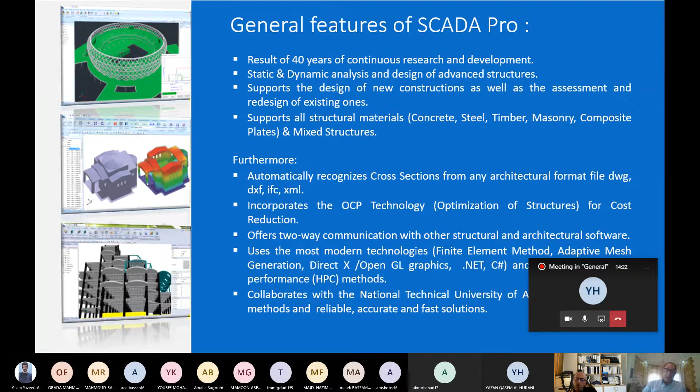It also offers two-way communication with other architectural software and uses the most modern technologies. Our software has a collaboration with the National Technical University of Athens to create new methods and reliable, accurate, and fast solutions.

Also, its interoperability with leading applications and standard file types. SCADA Pro integrates BIM technology with two-way communication with any architectural and structural programs.

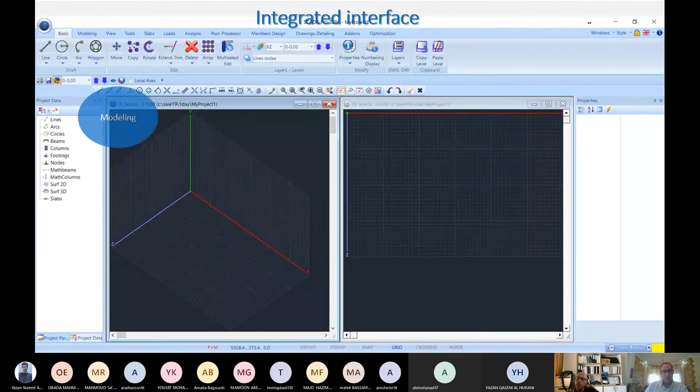You see here, this is the interface of SCADA Pro when you open it. It has different steps that we're going to use to start. We're going to start from modeling. You can model your structures, your foundations, the elements.

You're going to see the loads, static loads, dynamic loads, using different regulations, Eurocodes or each country's regulations and annexations. It also has the Saudi building code. You can do the analysis, which automatically calculates the combinations.

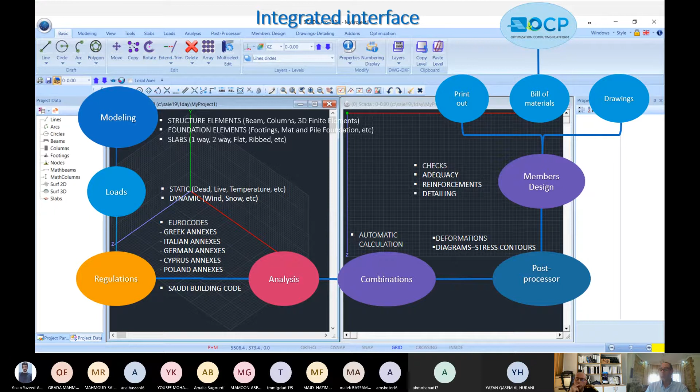In the post-process, we're going to see the deformations and the structural stresses and others. And also in the member design, we'll do the checks, reinforcement, and detailing. In the output, you're going to make the drawings, the bill of materials, and the printout, and finally we can do the optimization of the structure.

Also, it has an advanced interface. You can create multiple windows in your interface when you open the program, and these multiple interfaces can give you a direct display of the model on screens, checks, and also give you display and edit of data with tables in front of you.

It also has a powerful graphic library with high resolution virtual display. You can see the whole structure that you have modeled.

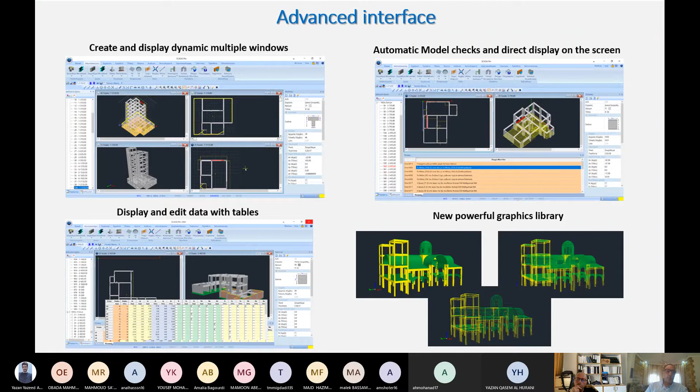Also, SCADA Pro is a multilingual environment which contains 8 languages, which also does the analysis and checks with the country's regulations and annexations, and also provides printouts in the respective languages. Also, it integrates the Arab regulations, Saudi building codes for concrete, steel, and masonry buildings.

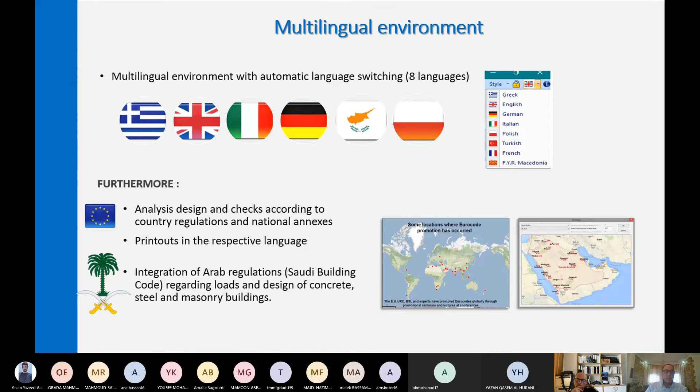And see what SCADA Pro enables the user to do and makes your life more convenient in the workspace. As we said, it recognizes cross sections for any architectural design, 2D or 3D DXF files.

You can insert it automatically just to apply the cross sections, and make the final model of the structure.

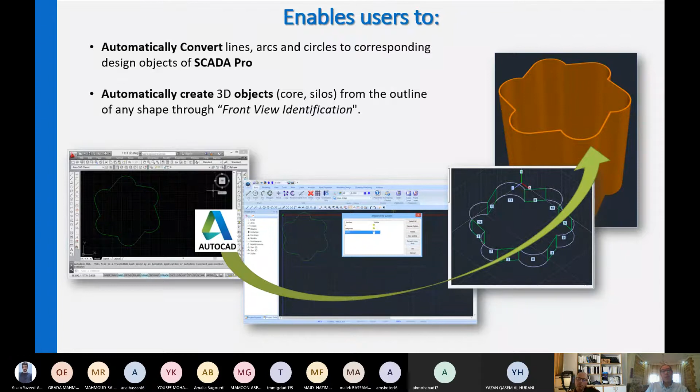Also, it enables the users to automatically convert lines, arcs, and circles into corresponding design objects of SCADA Pro. It automatically creates 3D objects from the outlines of any shapes through the front view identification, which helps you create any structure you want.

Also, it enables the users bi-directional communication between ETABS and SAP with SCADA Pro.

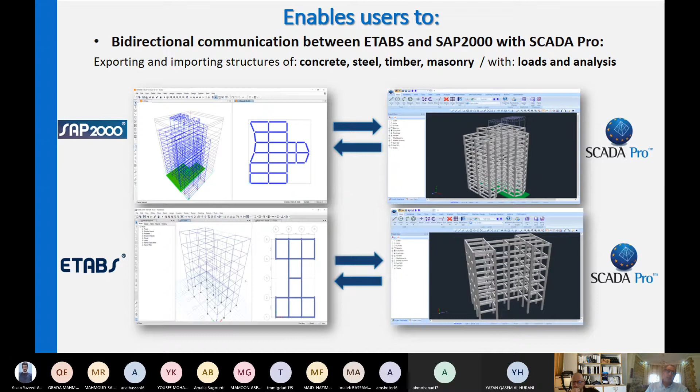We can import and export concrete, steel, timber, and masonry with loads and analysis. For example, here we have a project from SAP, which has the American codes. You can import it into SCADA Pro to use the Euro codes and do the modeling and design of the whole structure. Or you can model and design the structure in SCADA Pro, which has simplicity and other capabilities, and just do the analysis for the American codes in ETABS.

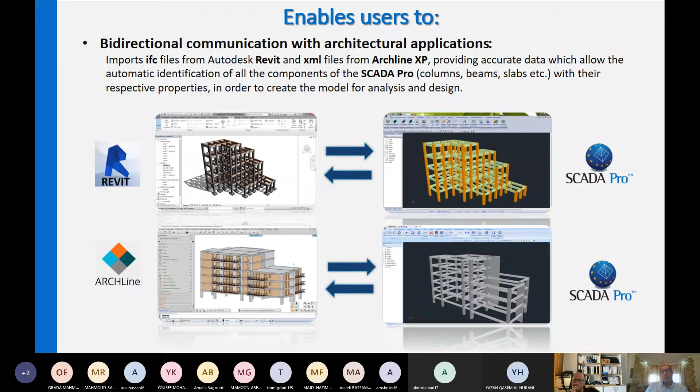Also, we have bidirectional communication with architecture applications. You can import files from Revit and xml files from Archline XP that provide accurate data, allowing automatic identification of all components in SCADA Pro—columns, beams, slabs, etc.—with their respective properties in order to create the model for analysis and design.

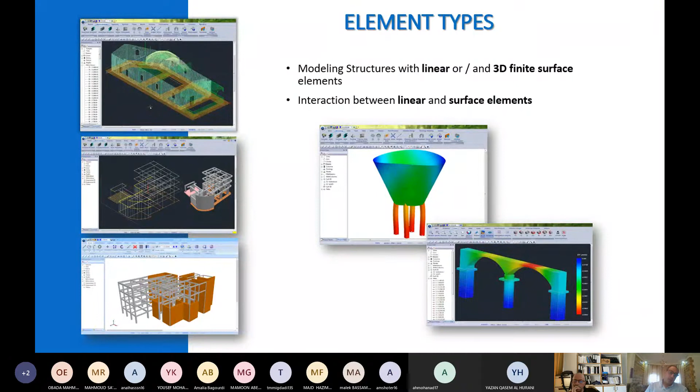Also, we have different elements that the software uses, so you can model structures with linear and 3D finite elements in interaction, also between linear and surface elements. So you have many capabilities in the software.

Also, the types of analysis the software does: we have static analysis, linear static analysis, linear dynamic analysis, pushover analysis—the professor will explain to you what pushover analysis is—linear time history analysis, and non-linear time history analysis according to the Eurocode and Saudi building code.

Type of materials that you use—we're going to start from materials. We're going to start with concrete.

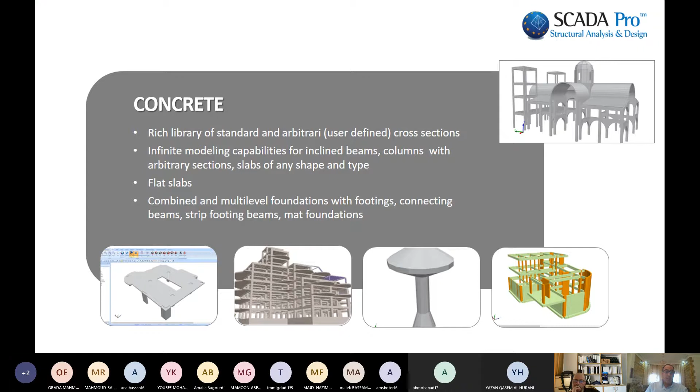SCADA Pro offers a rich library of standard and arbitrary cross sections, infinite modeling and capabilities for beams, columns with arbitrary sections, slabs of any shape and type. Also, it can do flat slabs combined in multi-level foundations with footing, connecting beams, strip footing beams, and mat foundations.

So also here, the simplicity of the software gives you unique features. The software automatically recognizes the thickness of the slabs and automatically designs the whole structure members and displays them.

It also gives you fail design checks, so you can know where the failure is and what the cause of the failure is, displaying the strength ratio in different colors. For example, red is failure, pink is a serviceability failure. You can alter that, and cyan means there's no failure.

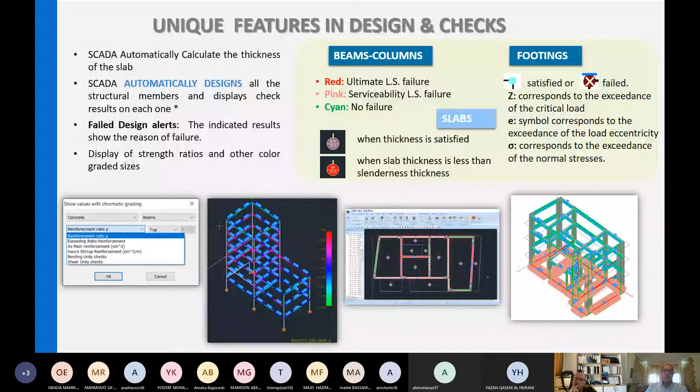Also you can see different indications for the slabs and for the footings. Also, with the unique features in design, there are powerful reinforcement editors for editing, modification, and 3D display of layers of reinforcement.

So you can do the reinforcement, automatic bending, shear checking, and moment resistance calculation by the M-N interaction diagrams.

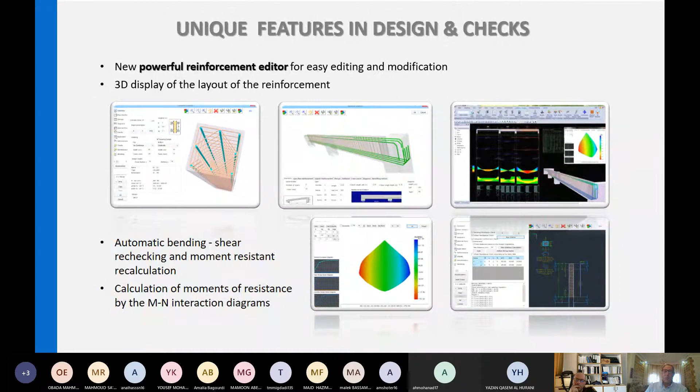So you can do all these, alter them and change them, and see them in 3D view and change and alter them. This will make your life simpler to edit and change these things.

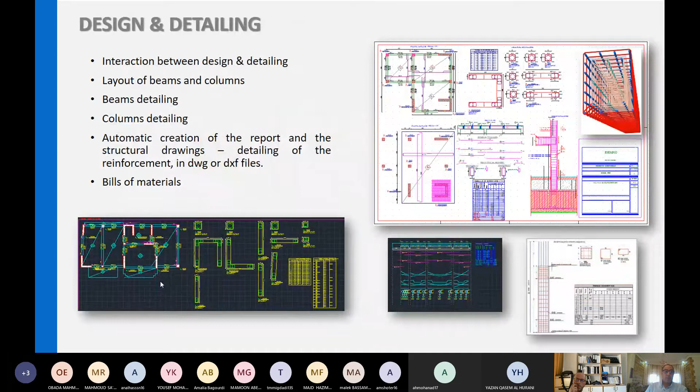Also, in design details, it gives you layouts of the beams, the columns, beam detailing, column detailing. Also, you can create a report for structural drawings and details and reinforcements into a DWG file, which will also give you the bill of materials.

For steel, we have a rich library of steel connections, steel sections, hot rolled and cold formed, with automatic templates for different typical structures. It automatically calculates and distributes wind loads and snow loads, and automatically calculates the combinations.

Also, you're going to see here we have different steel connections. The software has a library of different steel connections that you can use to modify and change your structure and the elements you're going to change.

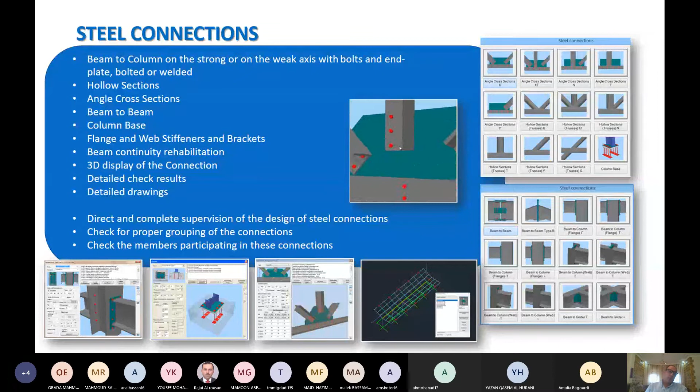You can do design checks for the steel member connections, checking structure members for bending, torsion, buckling—all necessary checks for ultimate and serviceability limits—and analysis and design of composite structures, and design of all types of structures.

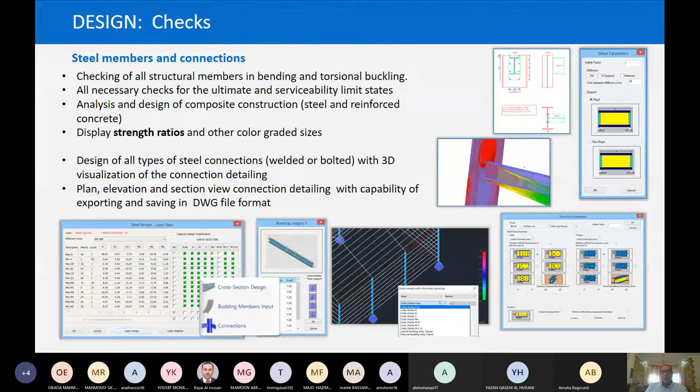All these you can plan and evaluate in the section view, with connecting details and the capability of exporting and saving it to a DWG file format. Also, we have cold formed steel sections.

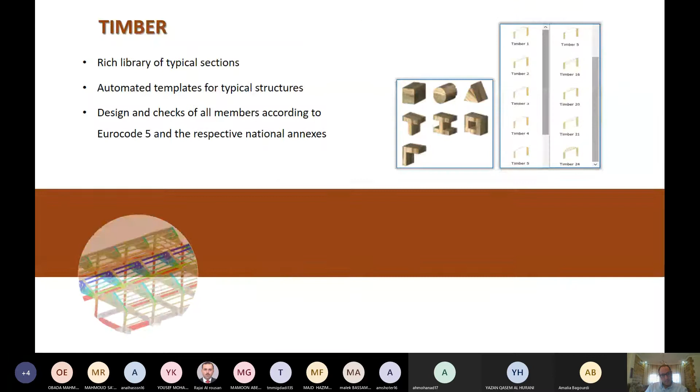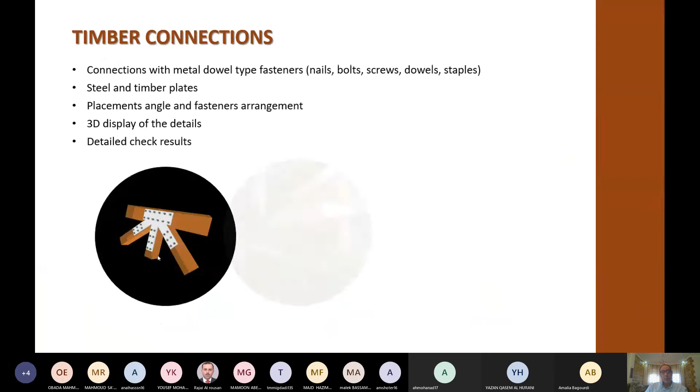Also, timber: a library of typical sections and automated templates and design checks for all members according to Eurocode 5 and respective national annexes. Also, timber connections of various types.

It does the checks for the timber members and connections according to Eurocode 5.

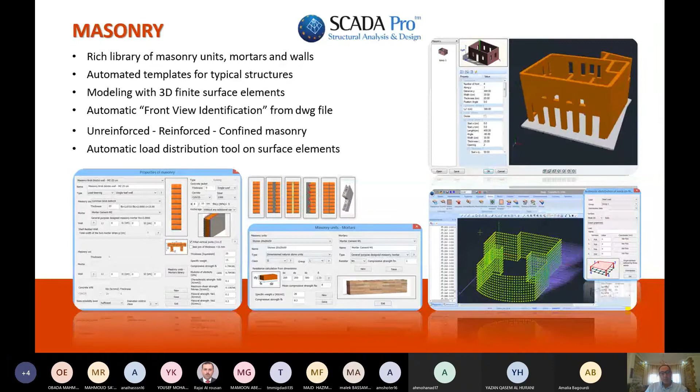Also, we have masonry: a rich library of masonry units and mortar walls, and automated templates for typical structures, which you can model with 3D finite surface elements, along with automatic front view identification from the DWG file. It will also automatically distribute loads across these elements and perform design checks for piers and spandrels of the masonry wall according to Eurocode 6.

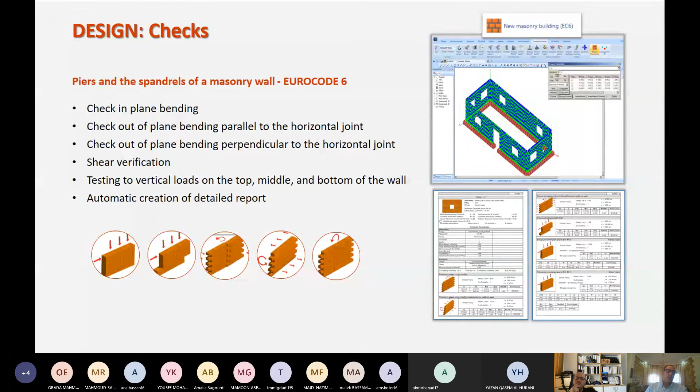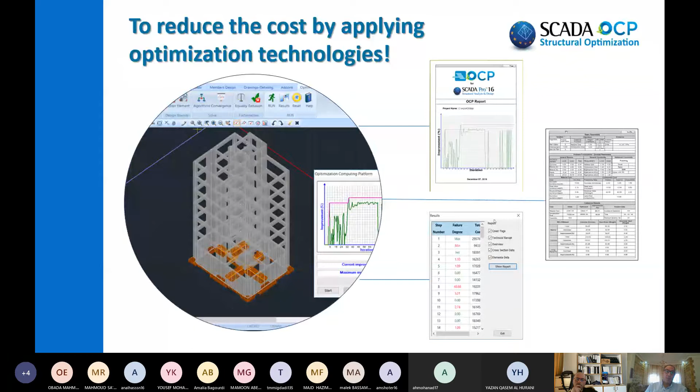And here finally we have the SCADA Pro OCP structural optimization module. It's a module to reduce cost by applying optimization technology.

ACE-OCP is a computing platform that applies optimization theory to real structures with the ultimate goal of minimizing construction costs from materials and labor. This will help you reduce your cost by 10 to 25% in any project.

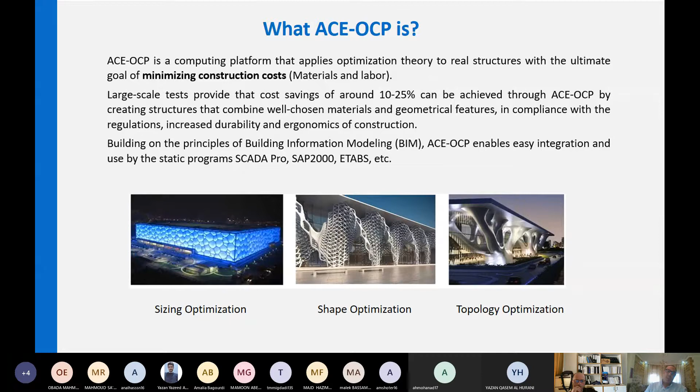And it's according to the regulations and codes you're using. Also, it has BIM technology, building information modeling, so you can use it with other software like SCADA Pro, SAP2000, or ETABS and others.

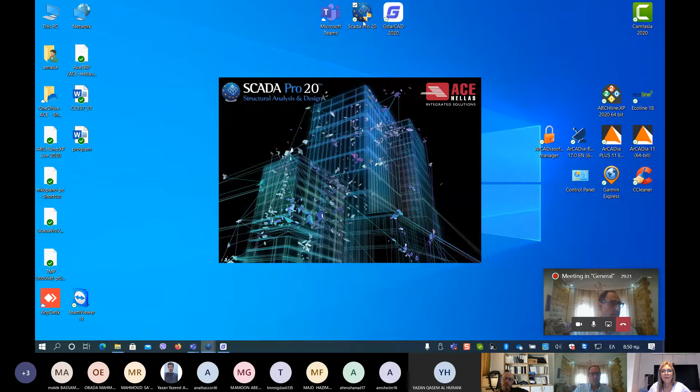So I waited a minute to open the software, and I will show you what I want all of you to do. I believe you already have the student license and have the software on your PCs. What I want you to do is right click, go to properties, compatibility, and run this program as administrator. In my computer it's already enabled because it's already done. So click this, then apply, and you will use it as administrator. This is important because you will have all the opportunities the software gives you. So let me go on. Why do I have it two times? Let me start from the beginning.

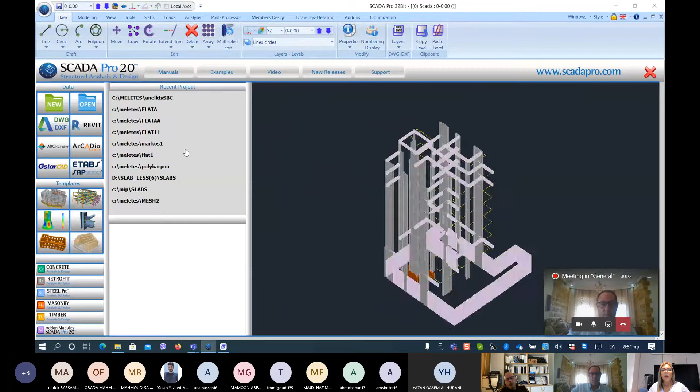Okay, this is how the software begins. In the middle of the interface, you see this window. This window gives you a lot of opportunities.

Let me explain. This is the first part we see, and you can click on these tabs to start a new project or open an existing project. You can also use this button, which we will use together. This is a very important button because you can do the automatic recognition of the structural elements, like Mohammed told you about in his presentation. We will push this button and see what we can do. But let me go on.

Okay, this is a Revit button. This means that if I click on Revit, I can read a Revit file, an IFC file, and import it directly inside the SCADA Pro environment.

ArchLine XP is the same thing, I can read an XML file. ArCADia is another architectural software, so I can do the architectural part and then use it directly inside SCADA Pro. GstarCAD is another software like AutoCAD. And ETABS and SAP, you know very well, are structural software that can be read by SCADA, and not only read, I can continue the project inside SCADA.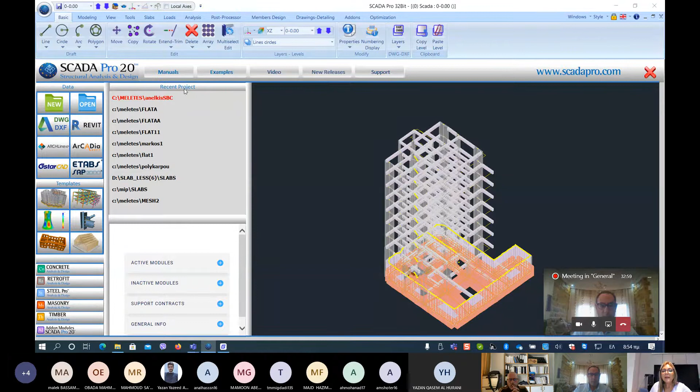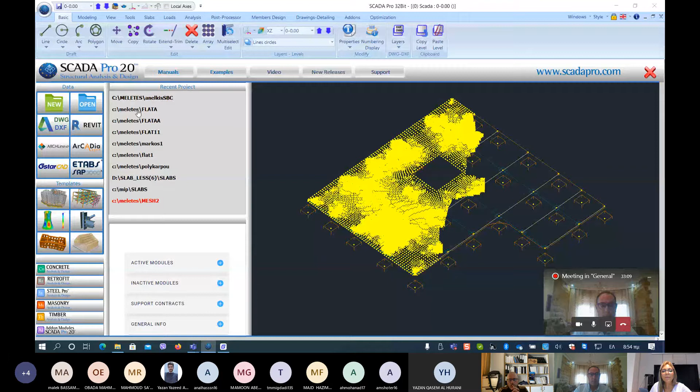Here I can see some recent projects. If I click on this, I can have a preview of the model that is inside this project file, and also some details about the modules you have, what is active and what is not active in your permission.

Furthermore, if I click manuals, this would be very useful for you. Inside you can find some PDF files that contain the manuals of the software. Each manual has the same name as the tabs you see on top, like basic, modeling, view, tools. Inside each one, you can see the explanation of all the commands contained in these tabs.

Inside examples, you will have other PDF files that are entire examples of different projects. We will talk about the first example, which contains a new concrete building, and we can see a lot of features of how to complete an entire project. This will be useful for you.

Videos, you have the opportunity to see some videos that can help you have a look at what you can do inside SCADA and how to do it. These are the most important. New Releases and support are not so important.

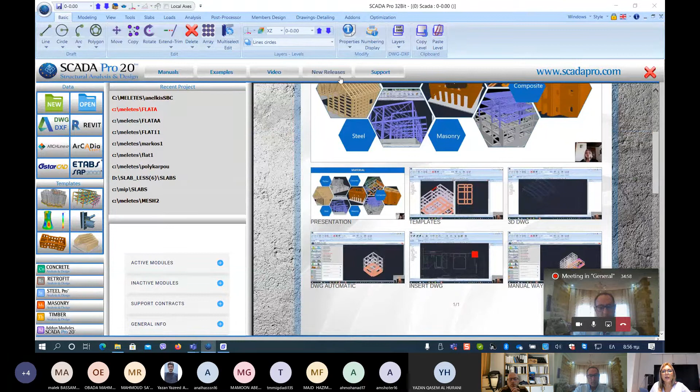So we explained this first window that is very important, but let me tell you something: if you don't close this window, you cannot do anything. I click here and I only hear a bling, so I can't do anything. I need to either close this window or click one button in order to start doing something.

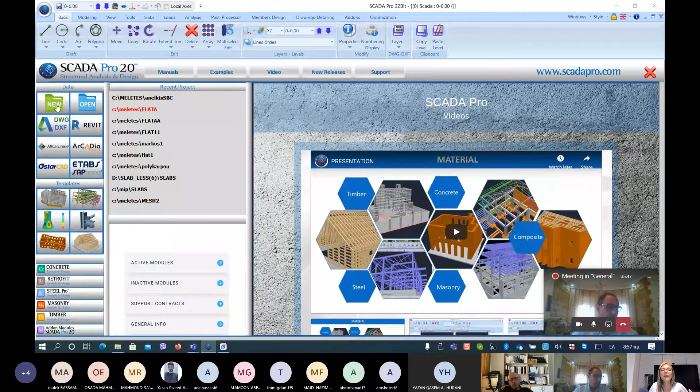Let me tell you another important tip. I will start with New, not an automatic way with anything ready. I will not use any beam connection, just New. I click New, and here the software tells me: please give me the name of the project. So the first thing you always have to do is type a name for the project.

So I will say this will be called lesson1. Let me tell you something: because this is an international software, we have to take care of some rules. Because of the different characters we have in Greek language, in other languages, please use only English, Latin letters in order to type the names. Use only Latin letters and/or numbers, and please do not use any question marks, lines, spaces, or specific characters, so that the software can be used all around the world.

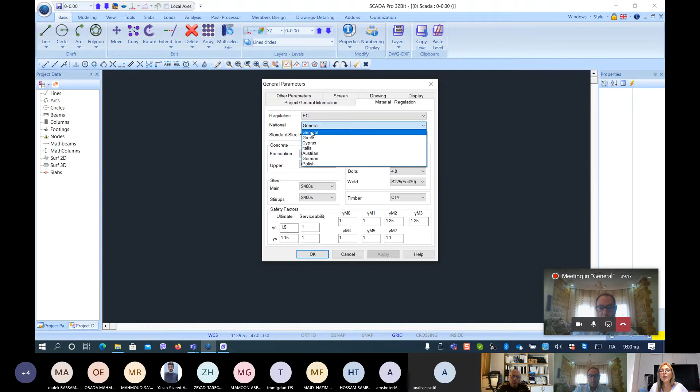Now I click OK, and then the next window that comes automatically is the general parameters window. It's nice to start by giving the regulation. Here I have the Greek regulation, but you don't need this in your country. I want you to decide either the Saudi building codes, or otherwise, and I believe this is better, decide the Eurocodes. I click Eurocodes, and here I have some annexes.

So in this case you will use the general Eurocode, and here you can decide from the beginning the quality of the materials used in your country. For example, in my country we use C25/30 even for foundation and for the upper structure, and for example usually this quality of steel for the reinforcement. Here you find the qualities that are inside Eurocode, and you decide what to use.

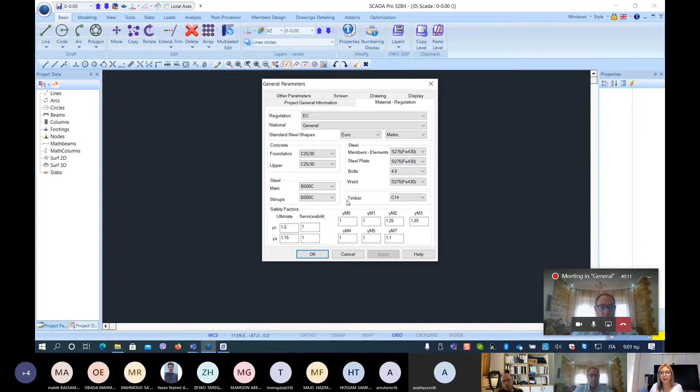I click OK, and now everything starts. You see two kinds of windows inside the environment. I can decide to switch off one of them and keep the other, or I can decide to create more windows like this, and then decide how to dispose all these windows.

Why do we have all these windows? Because you can see the 2D view, the 3D view, and maybe the virtual view. Maybe you have two screens, so you can move one window into the other screen. The most important thing is that everything you do in one window, you can see it in each one. You can also start in one window and continue in another. We will see all these things while we work on SCADA.

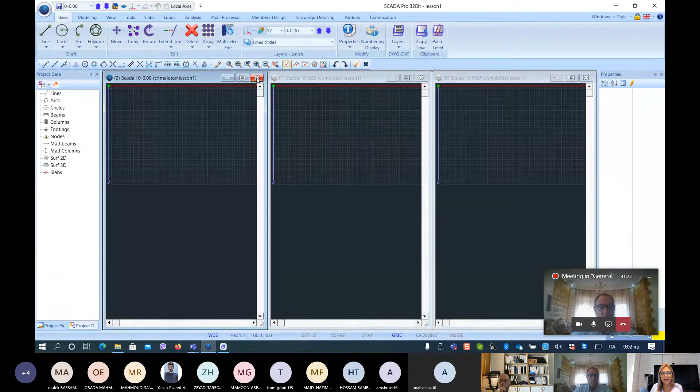Let me start with one window. Here we are in the 2D view. You may notice something a little strange: the 2D view is the XZ axis, and the Y axis is the vertical one. This is fixed, you cannot change it. You will use XZ for the floor plan, and Y will be the height.

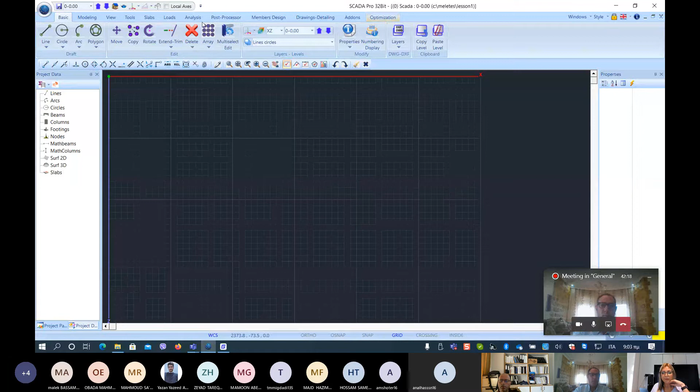In this environment, let's start explaining these tabs. We'll start with the basic one. Here you can find commands very common in CAD software: you can draw a line, a circle, an arc, move, copy, rotate, extend, trim, delete. So you see a lot of architectural commands, and this is what we call architectural commands.

Here you can see layers, something very common in CAD software, and the levels. Let me explain this. You see that I am at level 0. So the first window is level 0. What is really important to understand from the beginning is that level 0 is the foundation level.

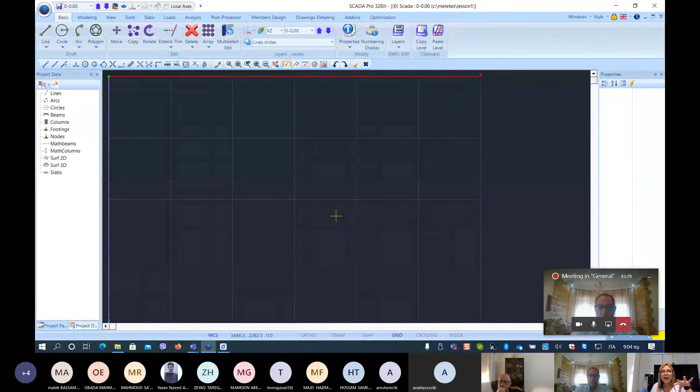So let me explain: the level that you put as the foundation is this one. Maybe you have a construction with 2 or 3 foundations. Some big buildings have a lot of foundations, but don't worry, this will be the first, bottom foundation. That means the first level will be the second foundation, then the third foundation, and then the regular levels start.

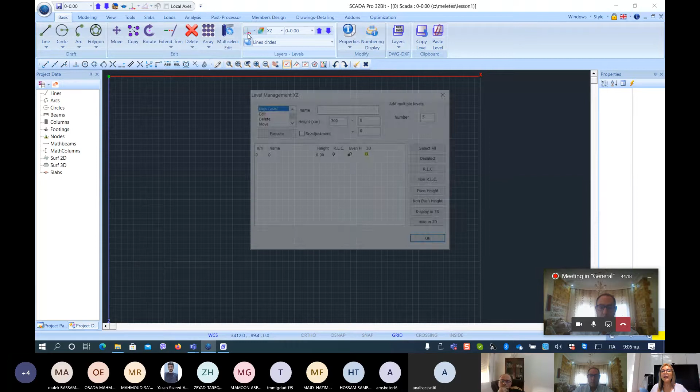So we start with 0, and we can create other levels. How do we do this? We click here, this is the level management, and I create a lot of levels. I can directly click 'add', and as you see, I made a lot of levels.

After doing this, I can use the arrows to go up or down. Another good thing to mention: if I go away from this tab and open the modeling tab, I'm not sure what level I'm working in. This is why, as you see here, I created my own line of commands so I don't need to look inside the tabs to find commands I use very commonly. How do you do this?

For example, if I need this command, I right click on it and select 'add to quick access toolbar'. Now I see it here. And if I don't need it anymore, I just click here and remove it.

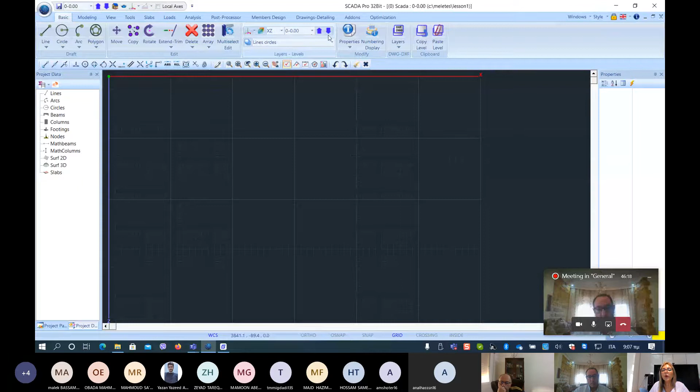For example, I can remove some other commands that I have here. I put the level numbering and the arrows here in order to go up and down. I will tell you what the most useful commands are, and explain why you need to create your own command bars.

I can also customize this, and instead of minimizing, I can show it below the ribbon. This is where I prefer to have my toolbar, because it's more useful when using the mouse. So here I can be in modeling and go upstairs and downstairs without entering the basic tab each time.

Let me finish with this part. Here we can see some properties and numbering. It's not very useful now; we will use it after we put something inside.

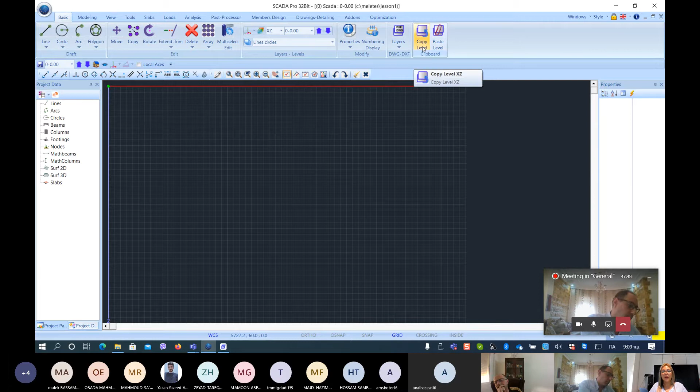DWG and DXF file options are here, meaning it has something to do with drawing files that I could insert inside. We'll talk about this later. Then there's copy level and paste level, very useful because I can model something inside one level, then copy and paste it to another level in order to save time.

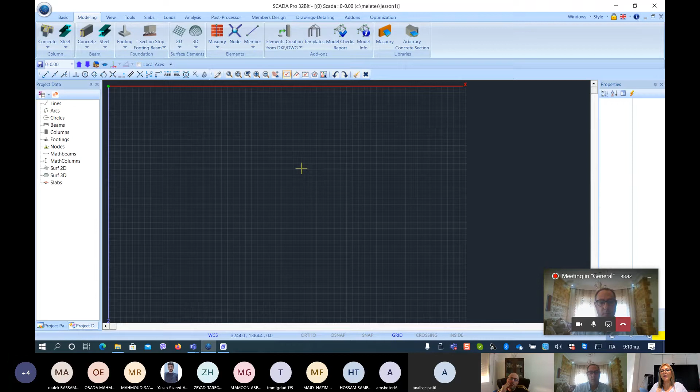Modeling is a very important tab, because it gives me the opportunity to model each structural element I need for my project. We start with columns. You see there are concrete columns, steel columns, and inside steel there are also wood columns. What I want you to realize is that inside this software and environment, you can find all kinds of materials: steel, concrete, masonry, timber.

And all the commands are common for each material. This is very useful, because when you learn something, you don't need to unlearn and learn something else for a different kind of material.

Next, footings here, so foundation and surface elements are very important. Mohammed showed you that you can use linear elements and surface elements.

Let me explain what linear and surface elements are. I will select a rectangular column, and you see this is the window that opens. I selected a concrete material, and the type, you remember in the first window I selected the quality of the concrete. So I found it here, and I can change it, I can decide another one. Everything I do is to save time, but I can always change the selection I made previously.

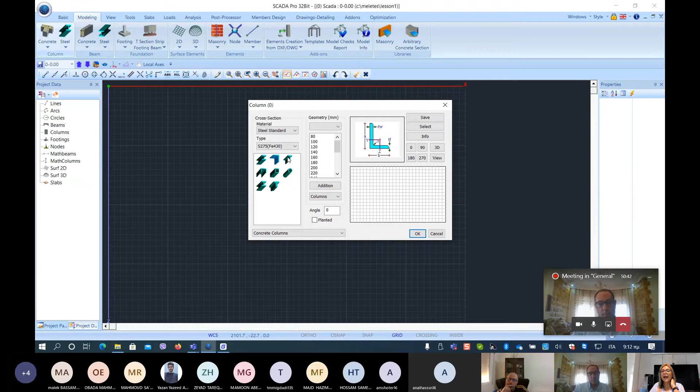Even here you see concrete, but let me show you. If I select, for example, timber, I will find the timber sections. If I select steel, I will find the steel sections. And what are these? These are libraries, libraries of sections. About steel, you see that some of these libraries are predefined.

You cannot create them, you can only decide the dimensions, because they come from Eurocode, Eurocode 3. These are the sections that Eurocode uses, and it's the same thing about timber profiles - these are the profiles that Eurocode uses.

And what about concrete? Concrete gives me a bigger opportunity. I can select, for example, the geometry, the type, but then I can decide the geometry myself. How can I do this? You see here the design section where you type the numbers. It's very important to realize that all the dimensions are in centimeters.

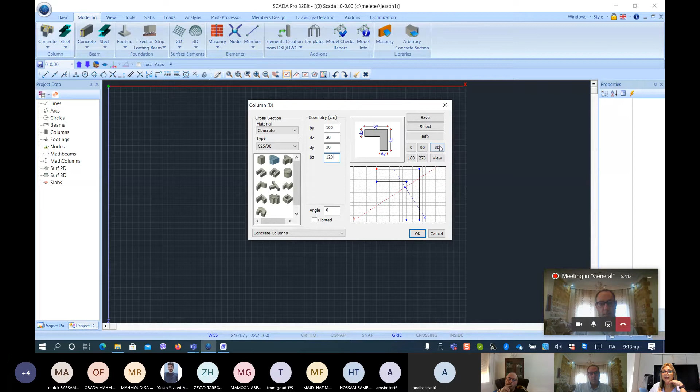So let me type, for example, 100 centimeters in y. The z, you see, this is the one, so let me type 30 centimeters, another 30 centimeters, and then for this part let me type, for example, 120 centimeters. You see that you design this here, and you can also see it in the 3D view, and you can realize the local axes.

These are the global axes, and you will see them inside SCADA with big letters. I don't remember how we call them, but the big letters are the global axes, and these will be with small letters, the local axes.

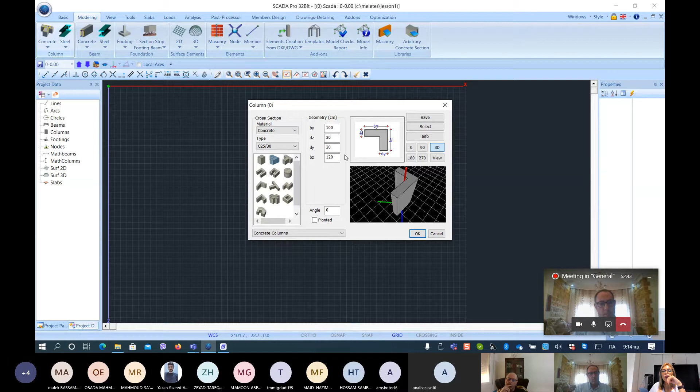If I now click OK - no, let me show you another thing first. Here you see there are some points, and I can choose these points, these are the insert points. I can also change the direction of the section. So let me click this insert point.

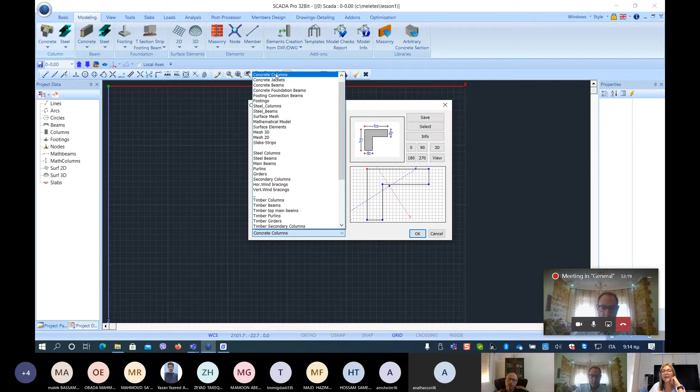Also, please note, as I told you, there are layers, and here you see these are the SCADA Pro layers, the structural layers. You see that automatically the software inserts all the elements I decide to insert inside the right layer.

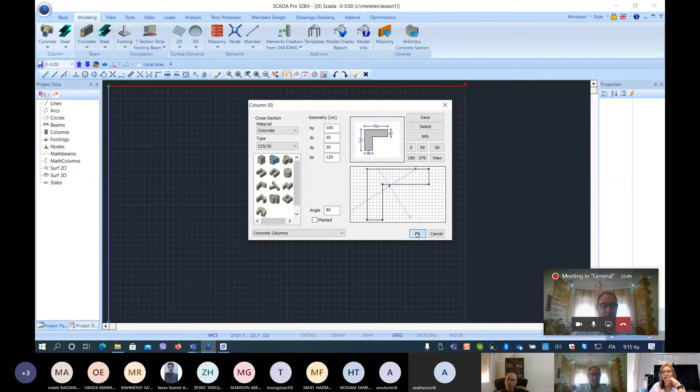Okay, Muhammad, is there any problem? Okay, I'll go on. So I click here, I click OK, and now here I see this section.

I can just left click and leave it there, or I can select some snaps - we all know about snaps. I can, for example, snap to grid. What I mean by snap to grid, you see I click and I click the grid, so I can insert this on the grid. The grid is 100 by 100 - we can change it, I can show you, but as default these squares are 100 by 100.

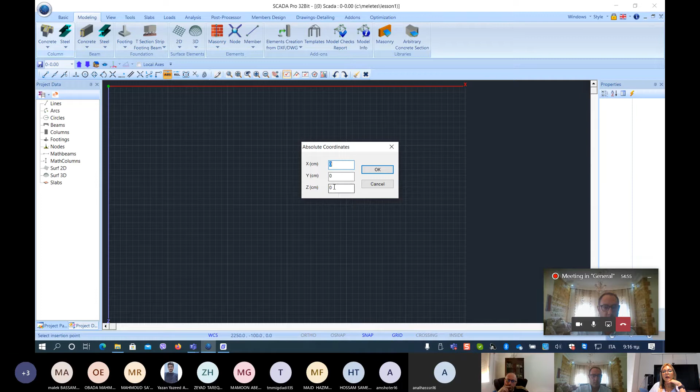So I can click and leave it here, or I can use the absolute or relative coordinates. From the absolute coordinates, I click 0, 0, 0, or I can say, for example, 0, and let's show you 100, and I click OK. You see, let me go near, that this is 100, and this is where the software inserts this section.

I can go on inserting the same section - you see, I click and I still have this section on my mouse. If I don't want to have this section anymore, I just right click. So I think it's easy to understand how to insert sections.

Then when I insert these two of them, I can go to basic and work like in CAD, so copy. I can use - here are the snaps, you see - absolute, relative coordinates, and here are the selection opportunities.

The window gives me the opportunity to select all by window. Then you see here on the bottom I have some commands that help me realize what I need to do later. It says select objects and right click, so I right click and then it tells me to give the characteristic point, and I give this characteristic point, then the position point, and now I have four sections of columns.

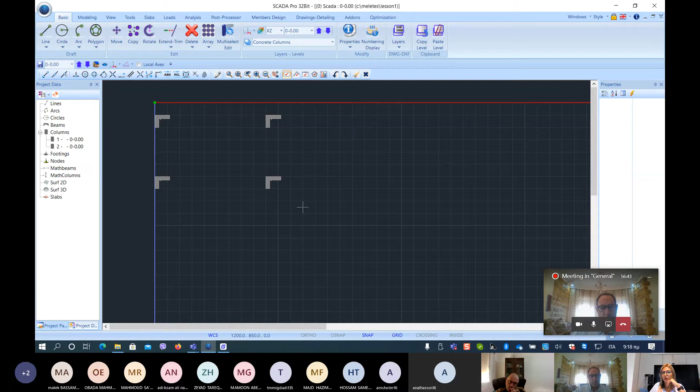But let's see another thing.

I switch off the snap, I don't need it anymore, and I go on this element. So I click on this element and look what happens. In the left part, I see a tree, we will call it tree, okay? So I see that inside the columns group, I have this element, I click here and I have this one. And now I can also refresh and open and see that there are 4 columns, and here is the other one.

I can see inside in the right part the properties. So you see that this is a concrete material section. This is the type of the section and the type of material, and here you have the geometry, and the most important thing is that you can change everything here, you see. So I can, for example, say that this would be 130, and you see this changed.

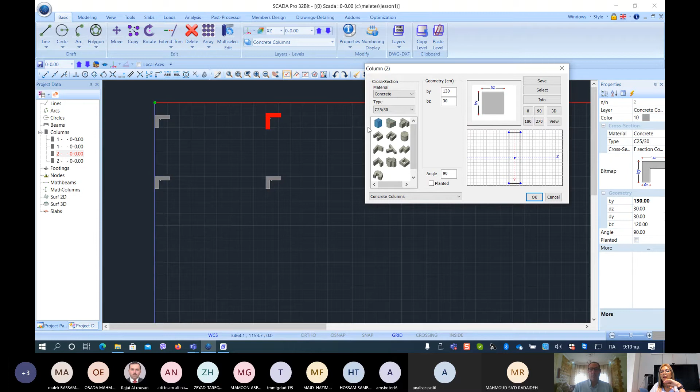And if I want to change all the characteristics of this element, I can go here on more, it opens again the window, the inserting window. It gives me the opportunity to change even the section. So I click OK, and I can change also the section. This is for you only to take confidence, okay, with the environment. This is what I want to give you in this first meeting.

So you see that I insert something, then I made some changes inside. I can change some characteristics. I can also...

This is important: right click, view all, is like the escape button. The escape button that you use to click for CAD softwares, you can do it in this way. Right click, view all. So I can delete this element, and I can also do undo, and I can have it again.

And these are columns, but let me do another small step for the first lesson, and insert some beams. But in order to put some beams and show you some things that I want, I don't want to do this in the 0 level, because like I told you, in the 0 level, I am in the foundation level, and in the foundation level, I don't have structural beams. Maybe I could have some footing beams, but not structural beams.

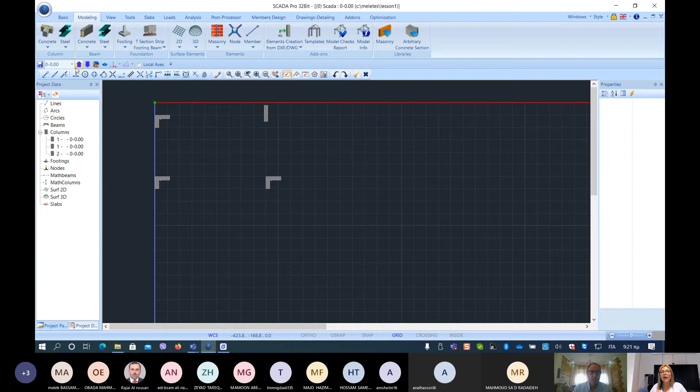So what can I do? I can go here on basic and click copy level. I go upstairs and I paste level. So now I am in the first floor. Let me show you here in the 3D view. Some of you will go here in the 3D view and say, but I cannot see anything.

And why is this? Because these are sections. So let's explain this. Sections are like a piece of paper, so it has no three-dimensional characteristics, okay? It will have three-dimensional characteristics after I do the mathematical model of these elements. So this means that these are sections. Then there is the mathematical model, and this means that section plus mathematical model gives me the structural element.

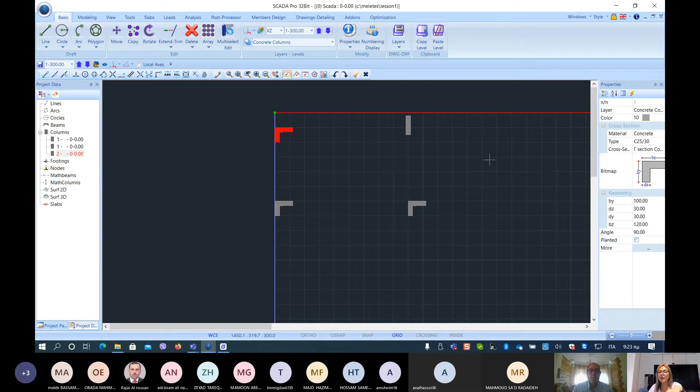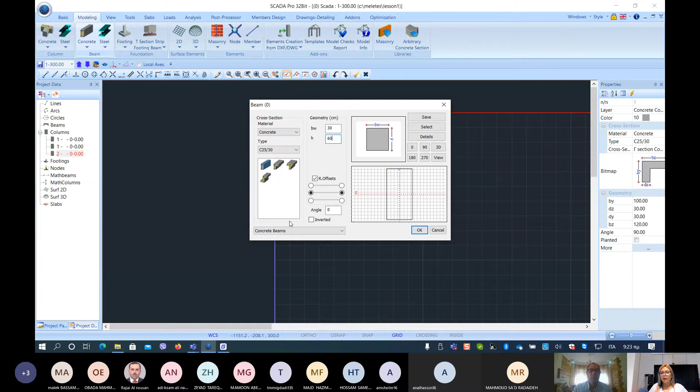That was a preview of what I'm going to show you now. So I am in the first floor, okay, and let me put some beams, concrete beams. I select the simple one, so 30, 60. It goes directly in the concrete beams, and I click OK, and I want you to see something.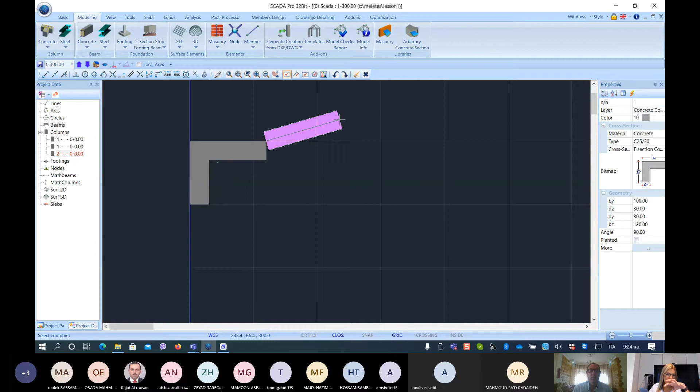I select the snap, the most common is the nearest one. So I click here, and I can start from a lot of points. Let me start from here. You see, I start from here, but it gives me the insert point of the beam to be the center one. I can click tab, I just click tab on my PC, and you see I can change the position. Okay, so I need here.

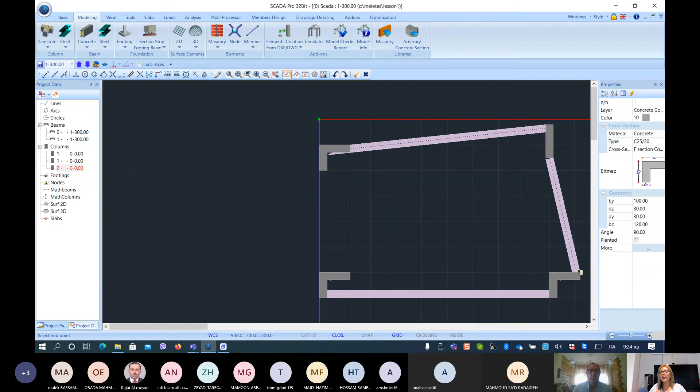Then I can go in some place, like let's put it here. Okay, and then I can start from here, and let's decide to put it here. From here, tab, I put it here, so I can do whatever I want. This is only to show you something. So I have this combination of beams and columns, okay?

And now, if I go downstairs, you remember I have only the columns. Here I have beams and columns. And let me do the step that I told you, because this is important to understand what are the linear elements, okay? I go here in tools.

I see the new tab that we didn't see previously, but I tell you that this is the most important command, because this is the calculation of the mathematical model, which means it will give me the inertial characteristics. So I click OK, and let me explain what happened here. Okay, now I have the opportunity. Let me open another window, vertical.

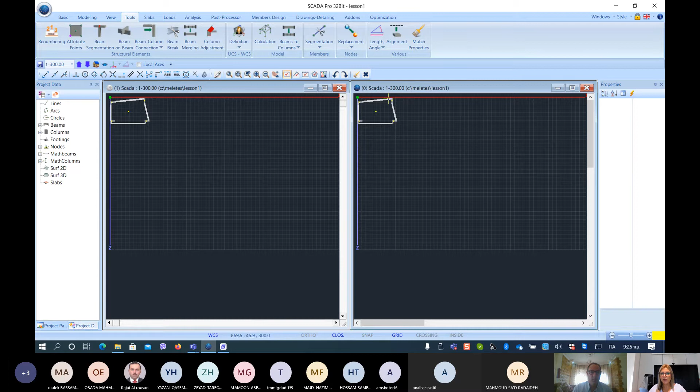So I click, you see, if this is blue and this is gray, this is the active window. I put my mouse here and you see this is blue and this is gray, so this is the active window. So I decide to see this in 3D view.

Here is the 2D, here is the 3D, and you see now not the sections, you see some kind of lines with some other smaller lines at the beginning and at the end. This is a very important point, and this is where I think we can focus.

Because now if I click here, I see in the properties, let me make it a little bit bigger, I see that yes, the cross section is a concrete beam, but the most important thing is that now this concrete beam has moments of inertia and all the mathematical characteristics of the concrete beam.

Also, I see a group called rigid offsets, and you see some dx, dy, dz, okay, and these are the rigid offsets.

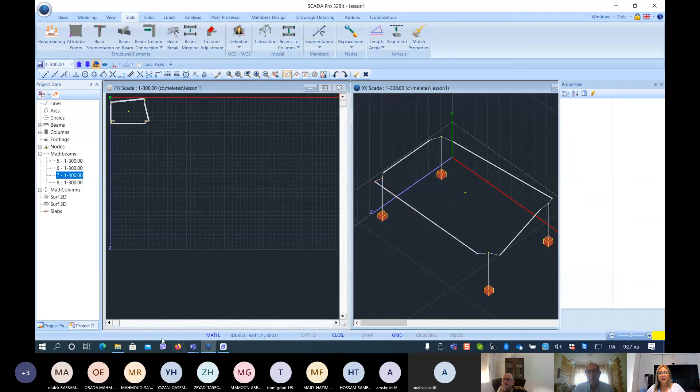So let me explain what these rigid offsets are. Here, I am on the button, the mathematical is mathematical, so this is physical. So now you see the section, you see the element like a concrete beam. This is a concrete beam, okay, and this is a concrete column. I put these columns and beams in this way in order to show you.

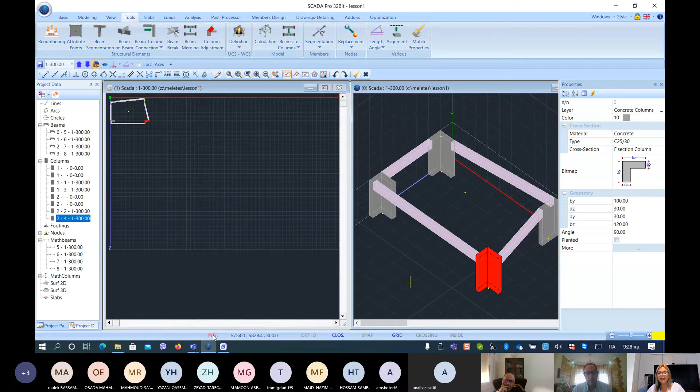I click here again so I can see the mathematical and the physical again. So look inside. This is the beam and this is the column.

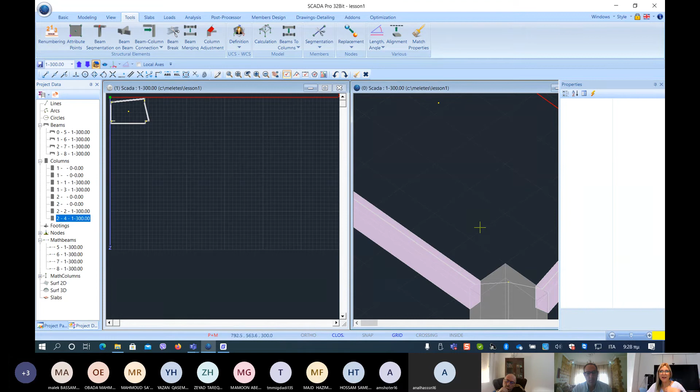When I need to realize this in real time, I need to insert a beam, and then I will stop the reinforcement and the material of the beam here that I found in the column. But the column has this node that is the geometrical point of this section.

So if I don't have this rigid offset, what will happen? This concrete part will arrive until this node, meaning I will have more beam, a bigger beam, and a bigger reinforcement. That means that even the counting of material will not be right, and also the design of the reinforcement will not be right.

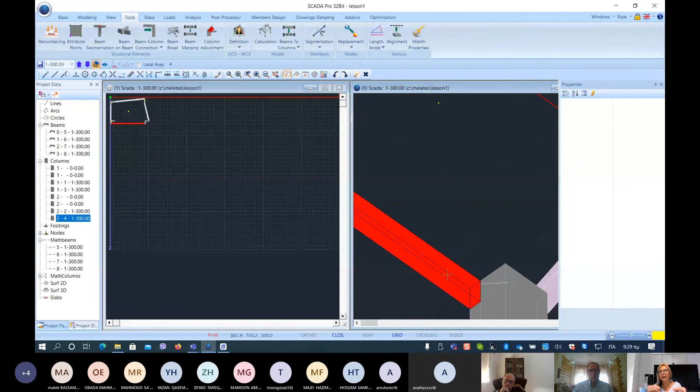That's why the software automatically inserts this rigid offset, let me show you this also in the 2D. Let me show you what happens if I decide to make this rigid offset zero. You see, I have the beam here, but the mathematical element of the beam is here.

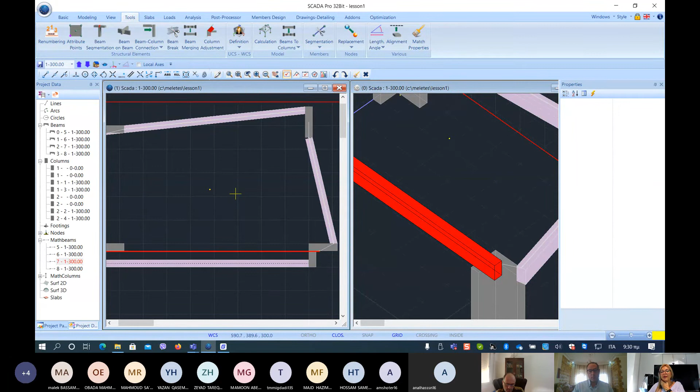So what is really important to understand is that with SCADA Pro, you have the opportunity to have the rigid offsets automatically. If some of you used to work with SAP, for example, this is something the user needs to do manually, going there to find the dx and write the number in order to combine the mathematical model with the structural element.

The last thing I want you to see for this first lesson, this first contact with SCADA Pro, is that after we create the mathematical model, we see nodes inside.

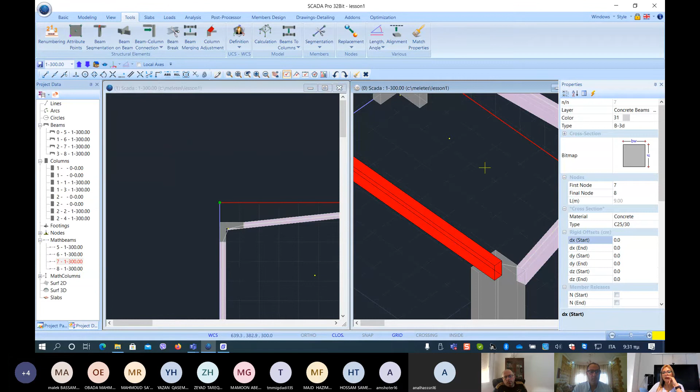So we see here vertical elements that are the columns. So I see a line, okay, a linear element with two nodes, one node and a second node. And these are the nodes that make the connection with the other elements. That's why we call them linear elements.

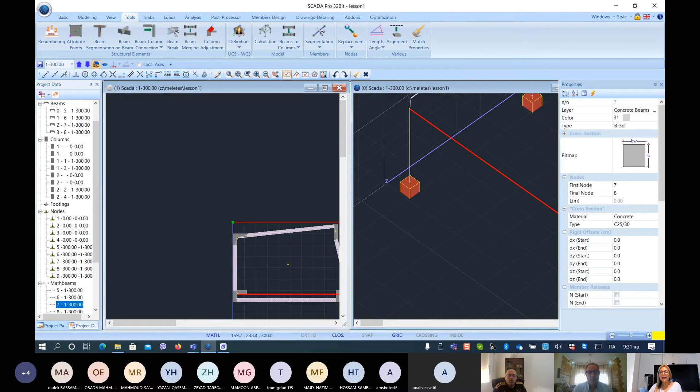Another thing you see here in the middle of the floor plan, you see another node. This is the master node. What is the master node? The master node is a node that gives me the idea of the slab. Let me explain.

When you have a slab here, it means that the nodes around this slab are, in some kind, depending in the deformation and the movement of the slab, dependent on the slab. So this master node gives me this function.

How can I see this master node? I see it here. When I create the floor plans, you see that there is a light, and this light is switched on, and this is the rigid link constraint. So the master node gives me the rigid link constraint, meaning that in the foundation floor I don't have this, but in all the other floors I have this rigid link constraint because the program realizes that in common structures you have slabs.

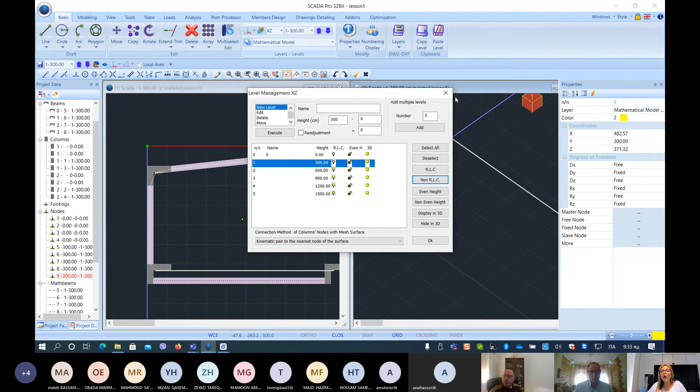If you don't want this, you can even decide not to have the rigid link constraint, or you can just delete the node. But before I do this, I want you to realize that this is node number 9. So let me show you what it means to have this node.

This means that all the nodes around this floor plan will be slaved from this node in the dx and dz direction and in the rotations. So this means in this floor plan there is a condition, okay?

If I delete this, did it work? I delete this, okay? And now I click on this node, I see that this is free - the degrees of freedom of this node is freedom.

So for me, the most important thing for the first lesson is to understand a little bit what it means - structural elements. So what a column is, a beam is, how they can be connected between them, how they can be slaved one from the other, okay? What means the floor plans, okay? What is the physical and the mathematical model, and why they are, okay?

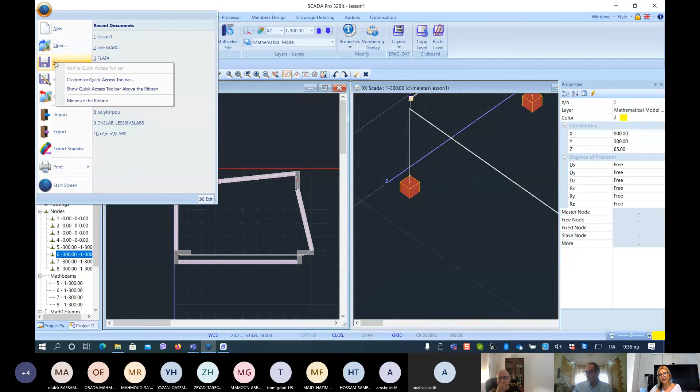Where did I find this one? I found it here. So what I did, I click and I add it in my toolbar. So I have it here. Very important - please do this, because it's very important to save.

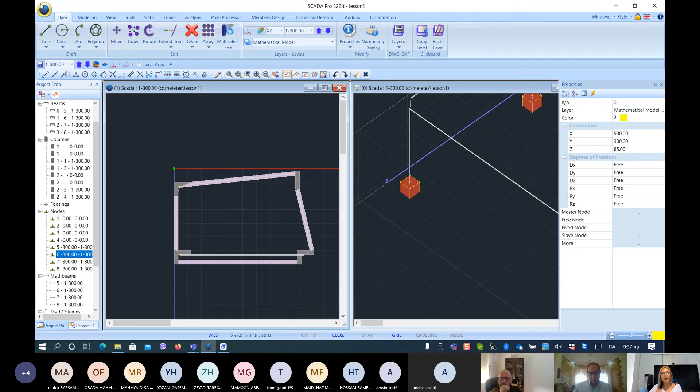Especially when you are a new one. So I save it, no? And now I can close the software, or I can just close the project. So if I close the project, I see the environment without the project, but then if I want to take it again, I can just select it.

So here I am. Now I switch off my - okay, I will try to do this. It's okay. Now you don't see my screen anymore, is that right? Okay.

Can I have some minutes? I would like - if some of you want to ask me something about this first lesson. Okay, two meanings: either this lesson was perfect, or you didn't understand anything.